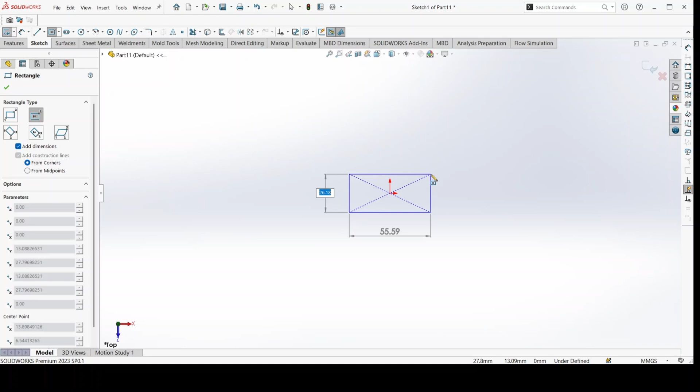We start by drawing the base as a cuboid on the top plane. Select the top plane, and using the center point rectangle, draw 20 by 30. I need to change the unit to inch first. Using center rectangle on the top plane, draw 20 by 30 inches, then extrude this by 0.4 inches.

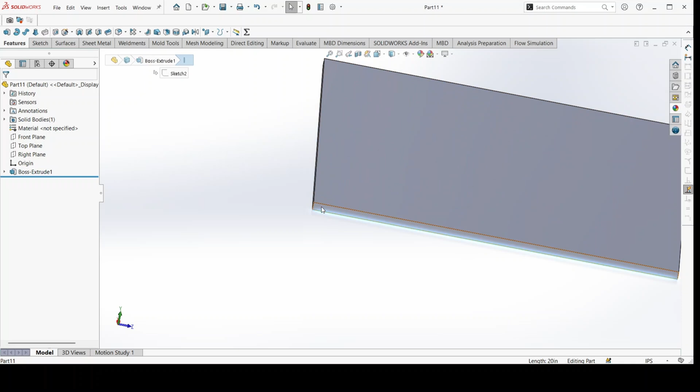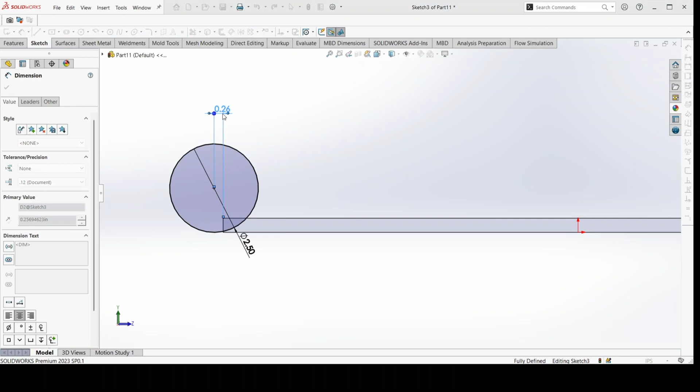Come to the shorter side, the 20 inch side. Select this face, then sketch, and draw a circle. Draw a circle of 2.5. Now click on the circle and click on the line at the bottom to make it tangential. Now click on dimension, click on the circle, then click on the line, and dimension it to 1.25.

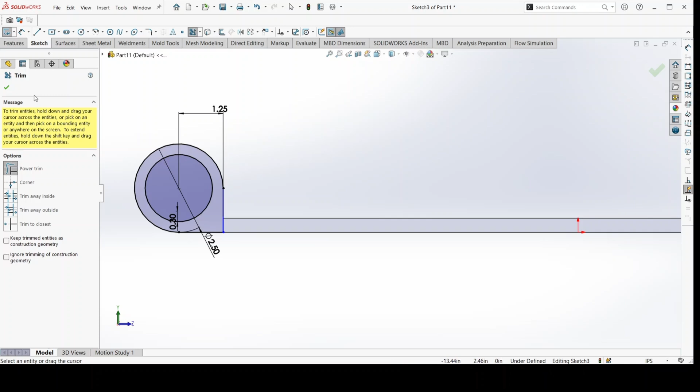Select the line command. Click on line, then draw a line from that point to the bottom, and draw another line down here. Now click on this circle, then offset. Offset by 0.3, then click reverse to offset in the reverse direction. Now click on trim command to trim this. Extrude this by 7.4 inches in the opposite direction.

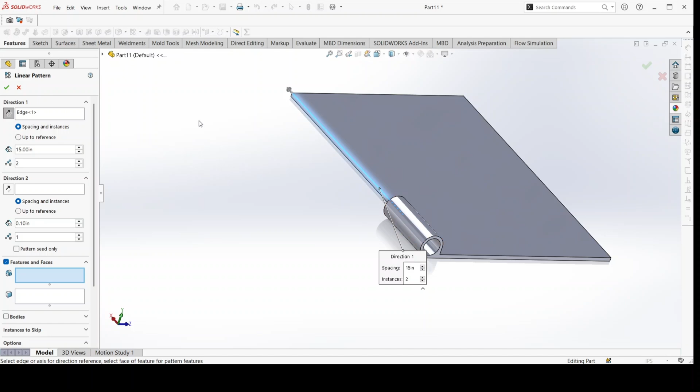Let's select linear pattern - so mirror. Go to feature, then select linear pattern. For linear pattern direction, select this straight line, that's the y-axis. The distance we want is 15 inches away from this point. So the next pattern will be 15 inches away, and we need just two. I need to select this feature now - click here, this arrow, then you can see it's at the center now.

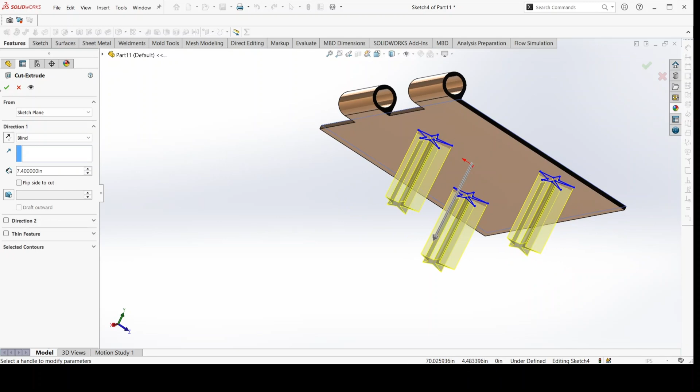Okay, so now we are done with the first part. Let's create a design here so it's not just plain. I want to create a cut design here of the stars. Just click on extruded cut, and you can see it's going to create this. Click okay - we have our star, and this is our hinge.

Now let's create the second door hinge, for the second pair of the hinge. We've already created our 20 by 30 - that's a very basic process. Come to sketch, select your center rectangle, then draw a rectangle of 20 by 30 on the top plane view.

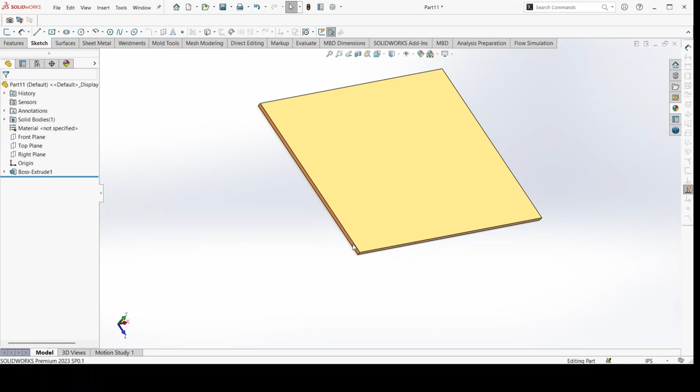Now in this case, the same thing we did in the first one - select this face, click on sketch. We selected the front part for the first hinge, but now for the second hinge you have to use the bottom end here, because if they are going to intersect, it has to be like this - otherwise they will not intersect.

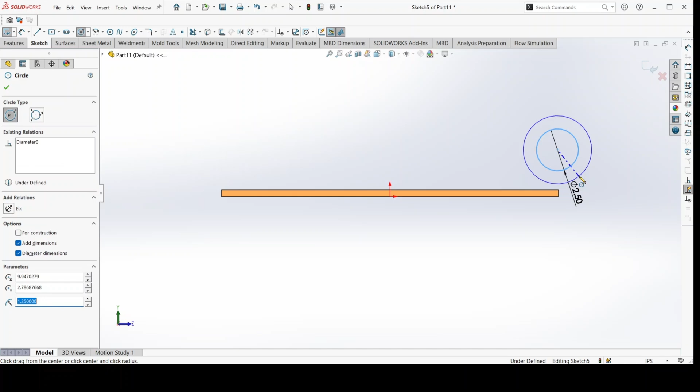I'm going to draw my circles - just a circle, then a concentric circle inside, like what we used the first time. In this case, I'm going to be extruding with an offset.

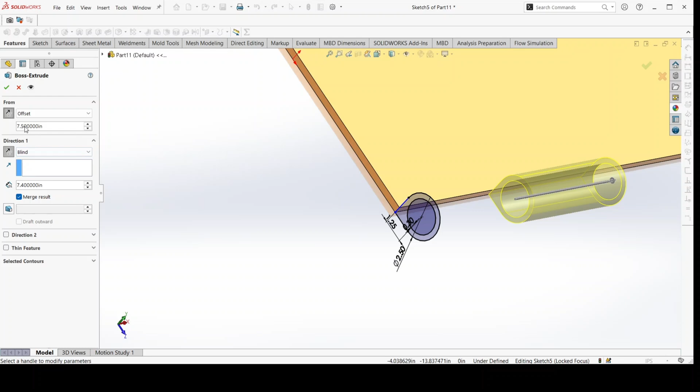I'm offsetting my extrude from this face by 7.5. Change direction - I'm going to start my extrusion from here, extruding 7.4 with an offset of 7.5. My extrusion is not going to be 7.5 because 30 divided by 4 is 7.5, and the longer side is 30. So if I use 7.5 here, there's not going to be any space, and that's very bad engineering. So offsetting the 7.4 extrusion by 7.5 distance.

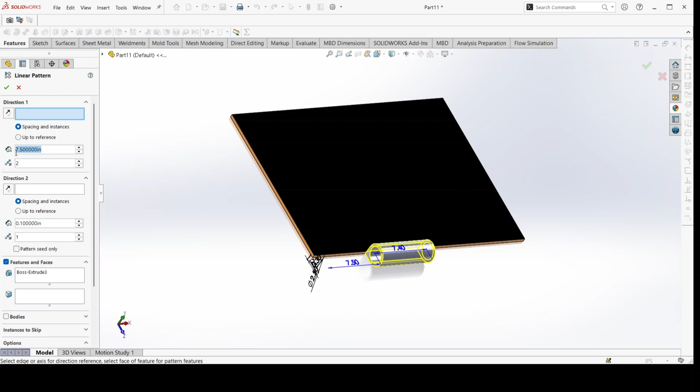So now what do we do here? I'm going to use my linear pattern. I'm going to give a direction and a distance of 7.5. I need 2 units - distance of 1, distance of 2. Select my direction.

That was the wrong direction. So clear, I'm selecting this wrong side. I'm selecting the direction. Good. So you can see it will give me this face, exactly this face.

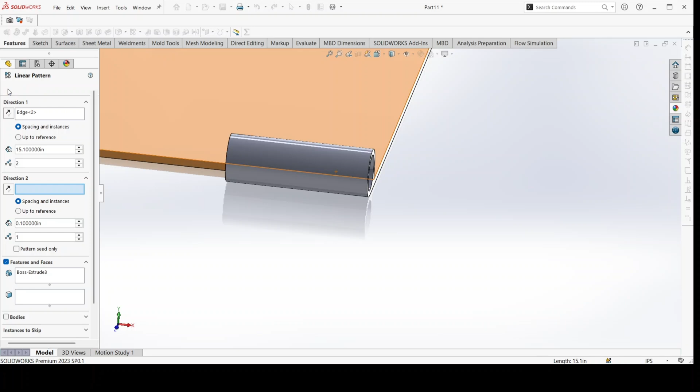I think we can use this. So now this is just exactly what we need for this one. So let's go.

Okay, so I want to create the screw, like a pin rather, a pin on the right plane to use to hold my hinge. I just need to draw a circle. The diameter of the inner circle, that was the offset circle, was 1.9, so use 1.9. Then I need a cap.

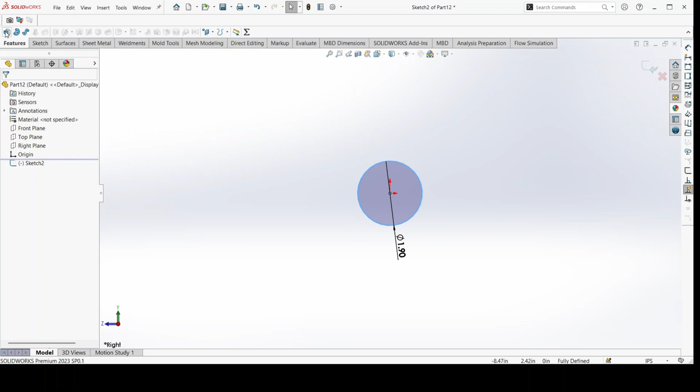Okay, let me extrude this face. Let me extrude this face. So the length of that side I used was 30, so I'm extruding this by 30. Okay, so I'm extruding by 30. Then click on this face.

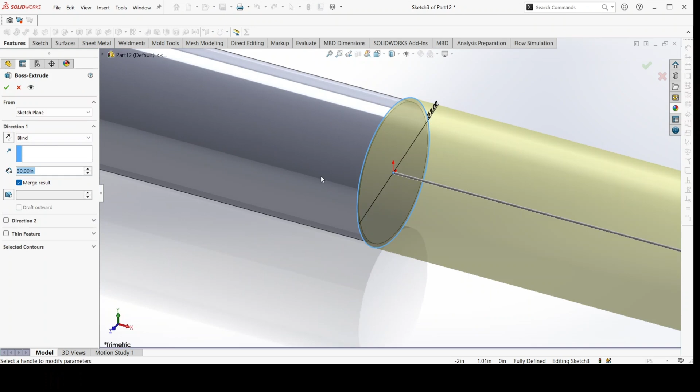So I'm using... I'm using 2, yeah, the cap, I'm using 2. The cap, then extrude by 0.3. 0.3 is too much, I can just use it.

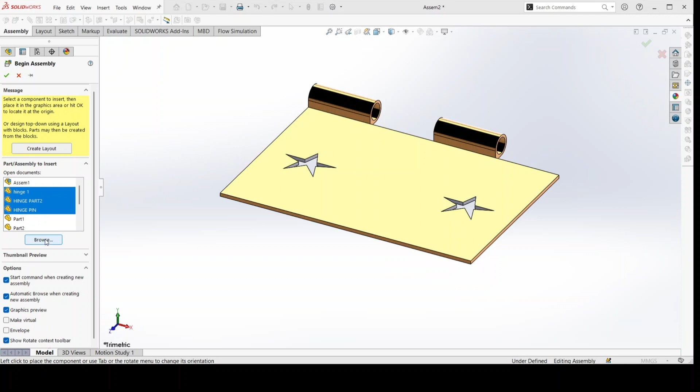Let's go to assembly. So I'm creating a new assembly. So hinge 1, hinge part 2, hinge pin. So let's go, I'm adding these 3 parts.

So here we go. What do we need to do here? Very simple. Click on it, and I want to use a concentric cylindrical assembly mate. Just select these 2. Concentric.

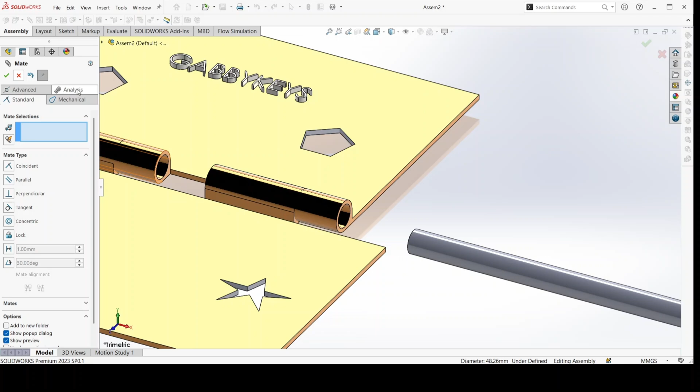It's not going to enter. Okay, it's going to have empty space here. So now let's go. After doing that, select this and select this inner circle. Now an edge, select the inner circle. Good.

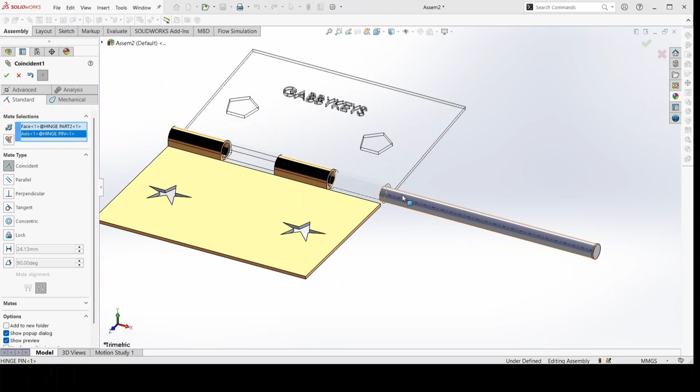Okay, so I need to make these 2 parts concentric. So concentric. So I've made them concentric. So now I'm going to...

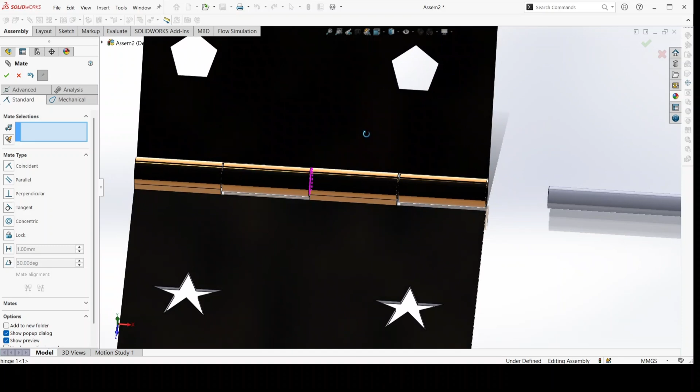Now what do I do next? I want to make this face and this face coincident, so they have the same distance away from each other. So you can see once I made those 2 faces equal, coincident, I can move this. I can see the little space that I have in between. So that's all we need.

Now these guys are concentric. Now I'm going to select this little face here. I have my reason for not making it too big, you can make yours bigger than that. So I selected that face, and I'm selecting this. And boom. Okay, I think we can actually increase the diameter to 3.

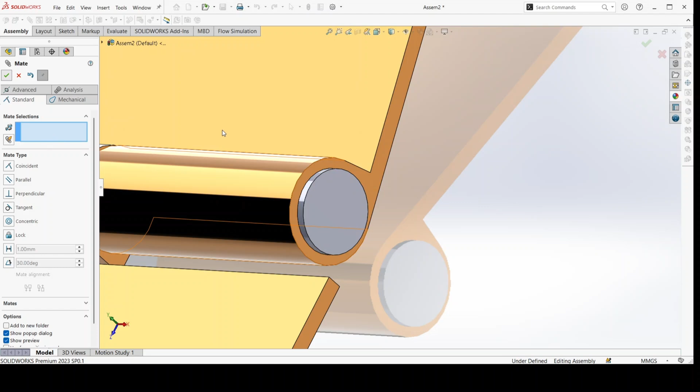So let's do that. Though we are done actually, we are done, this is the end. As you can see, we have our beautiful hinge. This is our hinge.

We want to work on the assembly, I want to make the rotation. If you want your rotation to be 180 degrees, like from here to here, you should be able to rotate 180 degrees, you can do that. And if you want your rotation to be just 90 degrees, like from here to here, you can do that too.

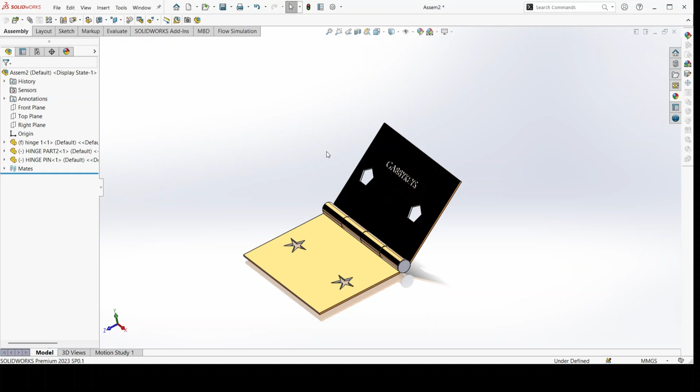So how do we go about that? I'm going to create a... okay, let me just continue from here. So now what do we do? Click on assembly, click on it.

So click on advanced mate, click on angle. So click on 0 here. So the minimum is going to be 0, then the maximum angle 90.

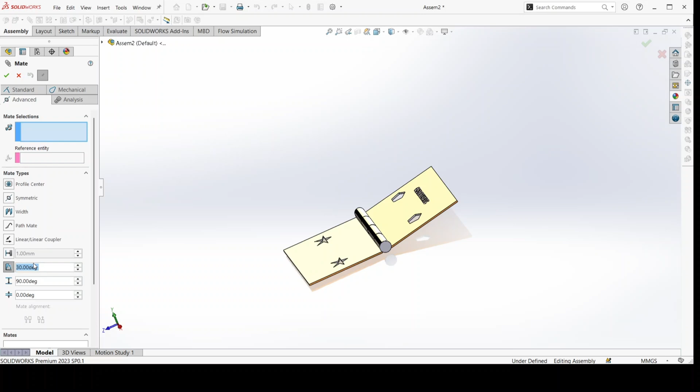If you want to use 180 degrees, just type 180 degrees as your angle of rotation, starting from 0, ending at 180, then select these 2 faces. Then now I want to flip. Okay, let me flip it. There we go.

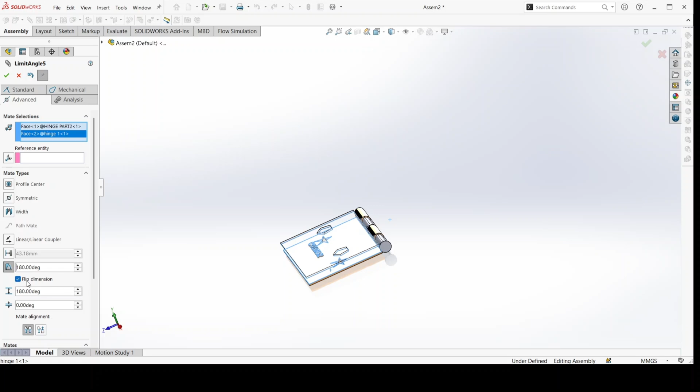Okay, so that's it. So if the angle is going opposite, then we'll select flip. But let's see, I've not selected the second face, so I'll be selecting the second face now. So now let's go, as you can see, it starts from 0, then it will end at 180 degrees.

Now you can see what the 180 degrees is looking like here. Okay, as you can see the rotation, it will start from 0 degrees, then it will end at 180 degrees. So that is that.